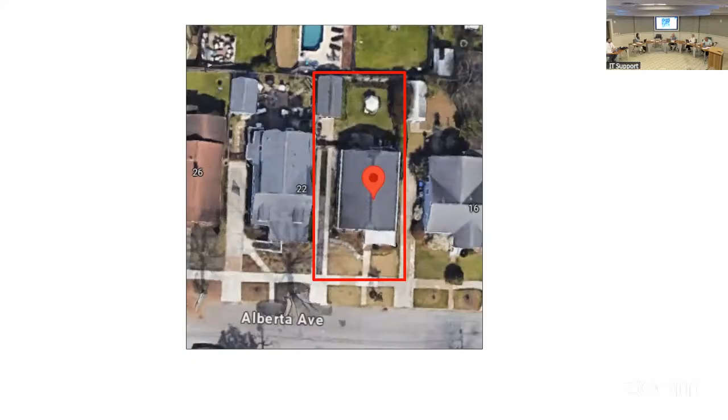Agenda item B1, 20 Alberta. Travis, if you'll give us an introduction and overview of the project, please. 20 Alberta Avenue is in Wagener Terrace, Council District 6. It is in the historic materials demolition purview, so it is a category 4 group 2, built circa 1940. They are requesting approval of a partial demolition, including the back portion of the roof. We have an aerial of the property, and we are ready for the applicant.

Thank you, Travis, and thank you, board, and thank you for meeting with me on the site this morning. Some of the things I said there, I'll say again so the public hears. The owners have been in the house for over 7 years. They're invested in this neighborhood and want to stay in the house, so they're looking to do an addition to allow for that to happen. It's a small house right now, just over 1,000 square feet.

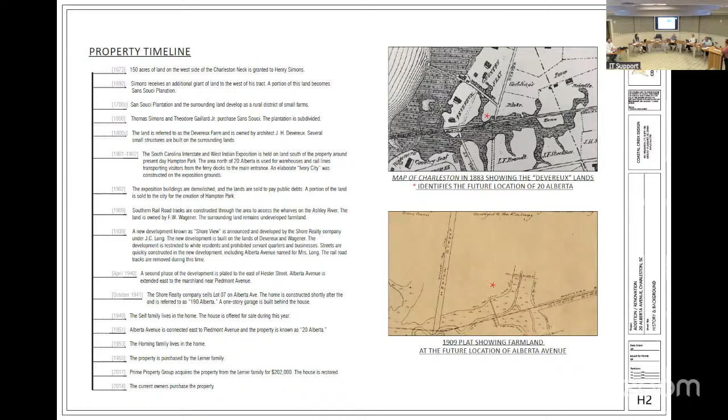We are looking to - let's see if I hit this the right way - so just some of the other aerials, historic timeline for the property, and we'll get to a nice little picture bottom left of what we have, the existing survey, and hopefully a demolition plan here. So we're removing the back third of the roof to allow for an addition to be put on the rear. Something I didn't mention on site but will mention today: that rear demolition - that first floor level on the rear will be 2-story, but that first floor level is a screen porch, so the majority of the siding material on the rear wall will remain.

We are stepping our addition in 12 inches from each corner to allow for the shape of the original house to remain intact. We feel that with the application we're putting forward, we're doing the best that we can to adhere to the guidelines that the BAR gives, that if there's going to be a roof that's removed, that it occurs in the back portion of the property to maintain the front. So we're attempting to do all of that.

Let's see, so here's the elevations. That window on the left side, that's going to have to be pantry area, which is the reason for the request for that removal. And then you can see the small portion of that roof, trying to keep the house as close to remaining the same and visually as is as possible, and still accomplish the goal that the owners have.

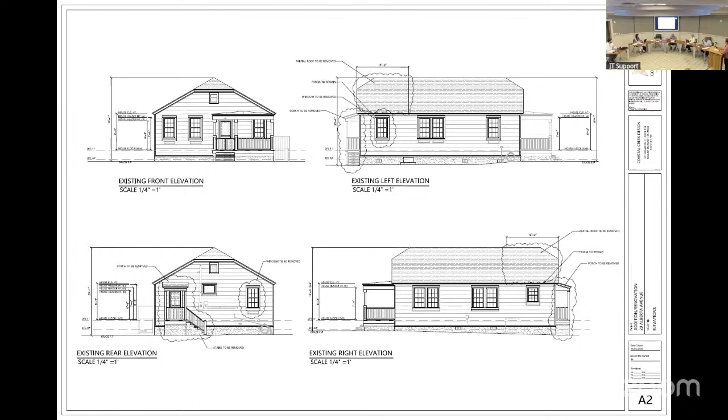Question: can you go back, when we were on site this morning, you said you would be removing the rear wall, did you? So, yeah, that's incorrect. The first floor addition that goes back is just a screen porch. And then what would be on the second floor would be the master bedroom.

Any other questions for the applicant? Thank you. Do we have anyone speaking?

I'm Catherine Alexander with the Preservation Society of Charleston. We thank the applicant for their time on site this morning. While we appreciate that demolition is concentrated to the rear of the roof, we ask that the scope of demolition be reduced and that both the ridge and the eaves be preserved to allow the distinct jerkinhead roof form to remain legible. We also encourage the applicant to reference the Wagener Terrace area character appraisal, which was adopted by the BAR in 2024 and is available on the city's website as a resource for identifying and preserving the character defining features that make this neighborhood so distinctive. Thank you.

Good afternoon, Lisa Jones, Historic Charleston Foundation. We've reviewed the request for partial demolition of the back roof and would like to express our concern that the demolition as presented is too large in scale, much like the Preservation Society just noted. We request that in addition to preserving the ridge, the demolition area be pulled back and away from the roof edge, and the clipped gables be maintained as a character defining feature. The height and width of the demolition should be reduced in size to be more in keeping with demolition needed for dormers. Thank you so much for your consideration.

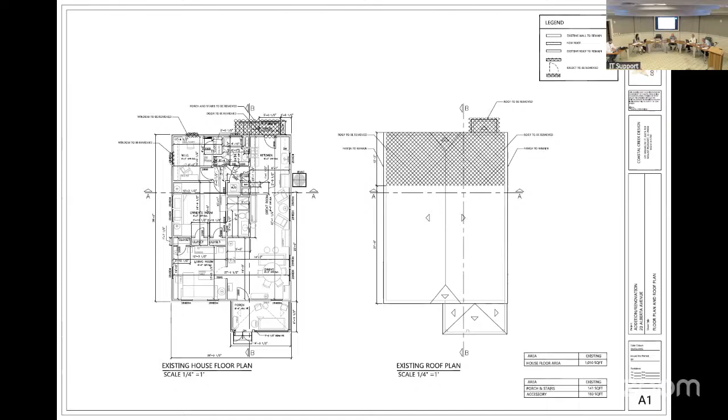All right, staff observations. Staff appreciates keeping the request to the rear of the building. The clipped gable roof is a unique roof form, and the proposed demolition would erase this character defining feature. This roof is highly visible from Alberta Avenue. Staff's recommendation is denial. However, staff would support a new submittal for demolition of the rear elevation below the eaves.

You, Travis. Joel, did you want to respond to or clarify anything? Sure, thank you. The intent is that we will maintain the eave line, the back ridge, that portion of the roof. That ridge was intended to come off there, but we would be stacking on the exterior wall, and then stepping in at the back, but we're going to maintain that eave line. I guess I'll just answer questions that y'all have.

I hope that y'all would be supportive, even though staff isn't and others aren't. But if you aren't, if we could maybe break this up, if there are pieces that could be approved so that we can move forward with redesign. That we hope. Thank you.

We got a question for you then. So if you say you're going to keep the eave and the hip feature at the back, is it not the hip feature, just that eave line, the fascia line, going? That little clipped part is coming off because we're putting something over that portion. Understood. Thank you.

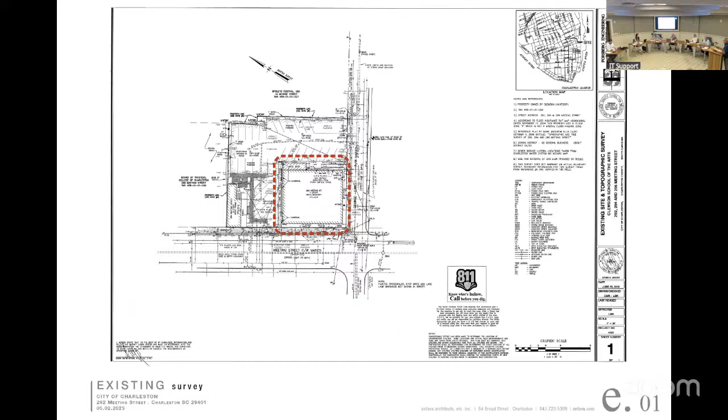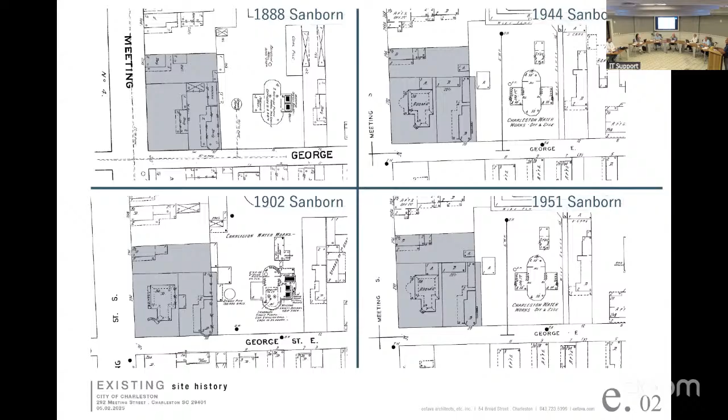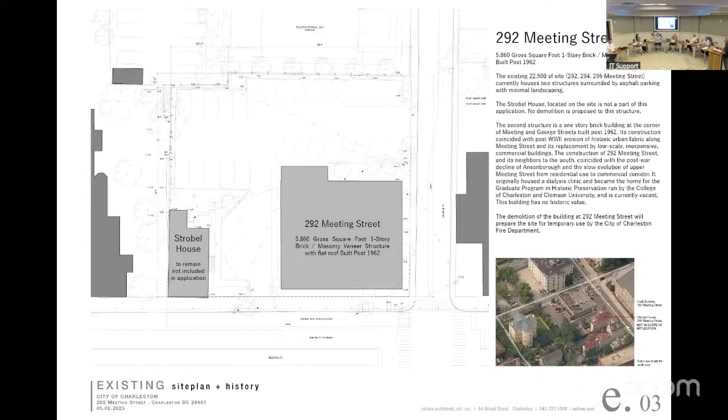As you saw, and in the submission packet, it was built in the 60s and has had several lives, the last of which was for Clemson University Architecture School of Preservation Program. But as documented by the Sanborn maps, there was another, very handsome structure there well prior to this building. It's just 292 Meeting that we'd be requesting removal for. It was requested for removal 13 years ago and granted at that time, but that project did not move forward, so it has been there since. There's nothing, quite honestly, related to it of historic value.

We did discuss the fact that some of the brick looks like it's salvaged, nicer brick from another project, but unfortunately a lot of the mortar looks like it's Portland cement, and I don't know that it could really be dealt with in a way that would save much of that. Again, interiors, as you've seen if you've been on site, the prior application was approved - so we appreciate your approval of this.

I'm also going to introduce Edmund Mose, the Director of Capital Projects, to kind of explain a little bit the genesis of this and why it's important.

Thank you, Eddie. Edmund Mose, Capital Projects, City of Charleston. So we've been working on this for quite a while with the planning department. This is in reference to a larger project, Fire Station number 2 and 3, the old central station, about a block and a half to two blocks south of this, at Wentworth and Meeting Street. A couple of years ago we did a full restoration - it's really for seismic reasons that we're doing full restoration on Fire Station 2 and 3, and we did one on number 6, on Cannon Street.

This is a life safety approach. The city is responsible for life safety, and we have to bring these old buildings up to seismic code, because if we have a seismic event it would take out our emergency response workers as well as the apparatus. Fire Station 2 and 3 is very integral to the city's safety program, because it's the only fire station south of Spring Street. The fire department always strives for an 8-minute or less response time.

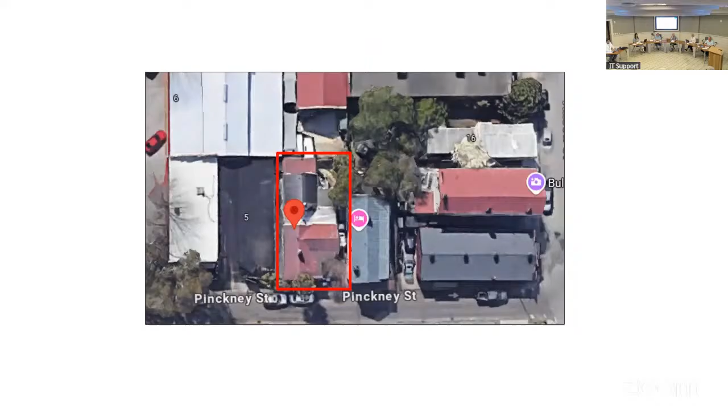Thank you. Okay, agenda item 3, 17 Pinckney Street. Travis, could you give us an introduction and overview of the project, please? 17 Pinckney Street is in Council District 8, category 4, circa 1902, in the Old and Historic District. They are requesting approval for demolition of select additions. This is the aerial view on Pinckney Street, and we are ready for the applicant.

Thank you, Dan Sweeney with Stump House. I apologize for my appearance, I left the house today without my long pants and shoes. I've been on job sites all day after seeing you all. Thank you also for meeting out, I'm just kidding. Didn't realize it till I was starting to head over here. Thank you for meeting me on site this morning.

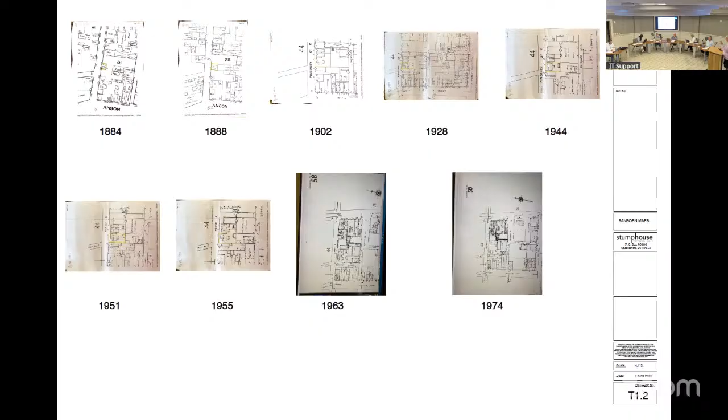The research I did to try and identify what the structures looked like on the site: the Freedman's Cottage first shows up in 1902. In 1928, there's an outbuilding shown on the maps that is illegible, but in the 1944 map it is clearly labeled a shed. Those two structures remain the same through 1951, 1955, 1963, and 1974. It's interesting to note there are several other buildings around, including in 1974, two single homes that were lost between 1963 and 1974. So it wasn't just a straight copy each of these successive years for this parcel, I don't believe.

The request here tonight, Pinckney Street is on your left. The red portions of the building, I believe, potentially are original. They have terne metal roofs, red terne metal roofs. Freedman's Cottage is on the left.

The three areas that are gray are actually three different colors of gray. It's hard to see from here, but the darkest gray, I believe, encompassed at one point in time a shed, a porch off the rear of the house, a very small porch, which was enlarged somewhere around 1950, I think on the 55 map.

But I believe we're looking at three different additions. The only addition that I can substantiate its age is the one with the stairs in it. That is a two-story addition. The other two gray areas are flat roofs, essentially. The one on the left is a TPO roof, and the one on the right-hand side is asphalt shingles, both flat.

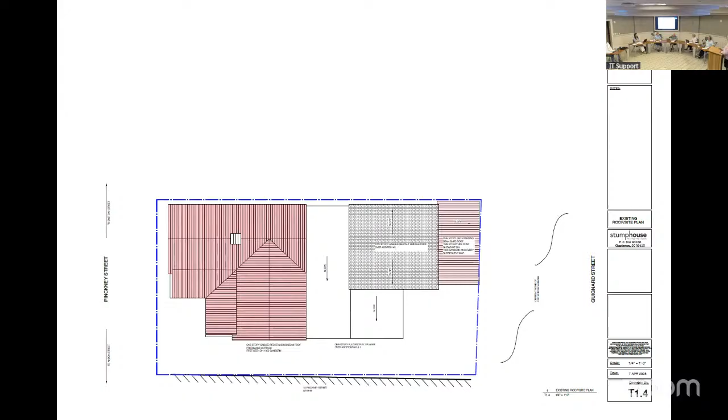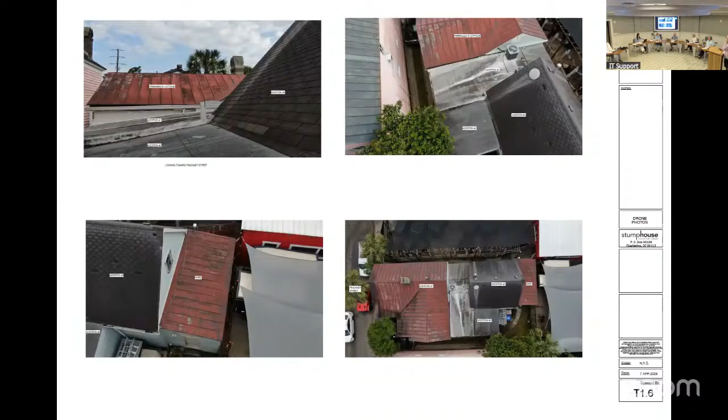This, you can see the flat roofs here. And then I had a series of photographs, exterior of the house. Here, we sent a drone up and you can see the roof lines. The bottom right hand is what I believe is the shed building out back.

And these additions - I will say then that the 1992 addition linked the Freedman's Cottage to the shed. Previously, before 1992, you had space out there.

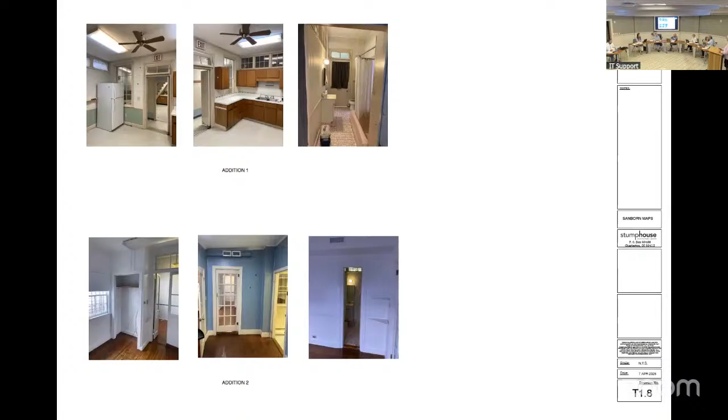And then there's some photographs inside, walking through the house and crawling under as much as we could with Richard Marks. We exposed some nails to try and see if they were common nails or cut nails. So there's a mix of both. There's a mix of siding. It is very difficult to tell. There are some, it looks like old door frames that have been used but probably moved from one place to another place. There's a lot of good material which will be saved.

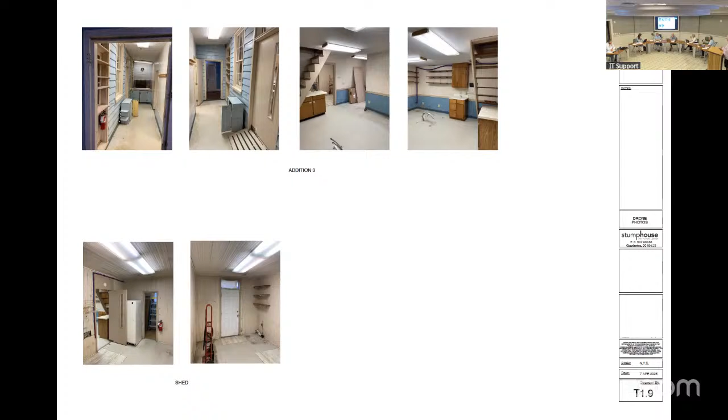This is what would have been the rear porch, I believe, a portion of it, but there are no walls. On the left hand, the top left, you can see that it was an exterior at some point in time. That's it.

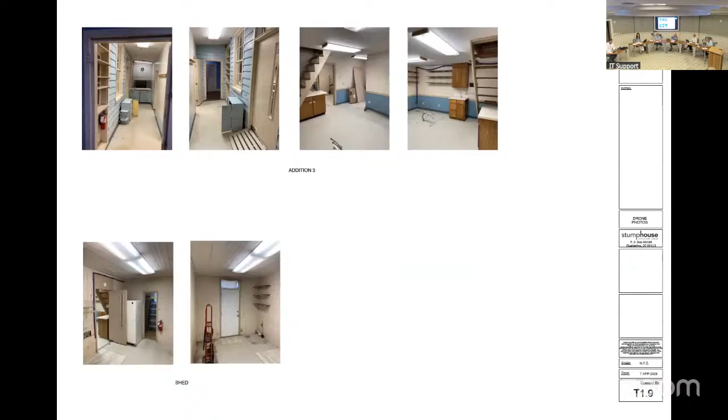Okay, Travis, if you give us any staff comments and recommendations, please. All right, staff observation, per the Sanborn maps, staff is opposed to demolition of what is being called by the applicant addition 1, as there are portions seen on the 1902 Sanborn map. We are just clarifying that the rear shed is not part of the demo request scope. Staff conditions would be addition number 1 not be demolished. And if approved, this project has to wait a 30-day appeal period before a permit could be approved. Our recommendation is approval of demolition with staff and board conditions.

Thank you, Travis. Mr. Twinney, did you want to respond to or clarify anything raised in the public comment or the staff comments? No, I don't, I would only reiterate that the porch that's off the rear of the house, I believe was there and is shown definitely on the Sanborn maps, but was much smaller than what's out there today. I believe it's been fully enveloped. And there's no walls to it, I don't think anymore.

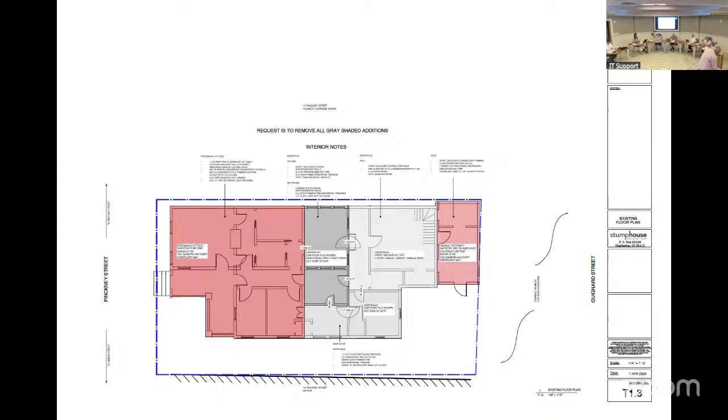Hello, I'm Julie Martin with Julie Martin Architects. Thank you all for taking the time to consider this application and even go visit this wall in person this morning. As you probably recall, the dwelling on this property has been approved for demolition and a new dwelling has been approved for construction, but I don't believe the wall was ever addressed in those applications. The contractor and owners would like to take it down to facilitate demolition and construction. Wertimer and Cline is working on a redesign of the garden, and they would like to reconsider the vehicular access and also add a proper pedestrian access. So I think it's pretty clear this is not a historic wall or special in any way, but we are here to request the demolition of it.

Thank you. Any questions for the applicant?

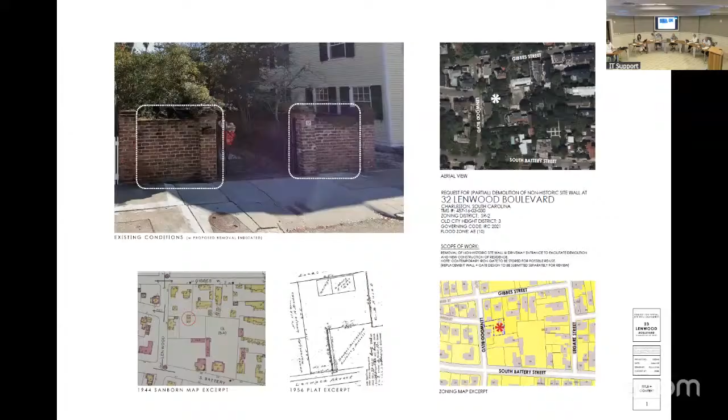Do we have anyone speaking? Travis, if you'll give us city staff comments and recommendations, please.

Staff observation: the wall is highly visible from Lenwood Boulevard. The construction date has not been provided to staff, and staff has not received proposed plans for reconstruction of the wall.

Julie, did you want to respond to or clarify anything? I was not aware that staff wanted more information. It would have been happy to provide that, but here we are.

Thank you all. Public comment and the applicant's presentation is now closed. We'll move into board discussion and a vote.

As to the age of the wall, that seems to be what staff is largely concerned with, and I think others would agree with me. It's not a terribly old wall. It's built out of concrete block, a CMU wall, faced with brick. The brick has a Portland cement mortar, not a lime mortar, so in my eyes this wall is not terribly old. It was probably built during one of the additions to the existing house on site.

The wall does contribute to the streetscape, so eventually something does need to go back, but that's a different review. I'm inclined to support the application.

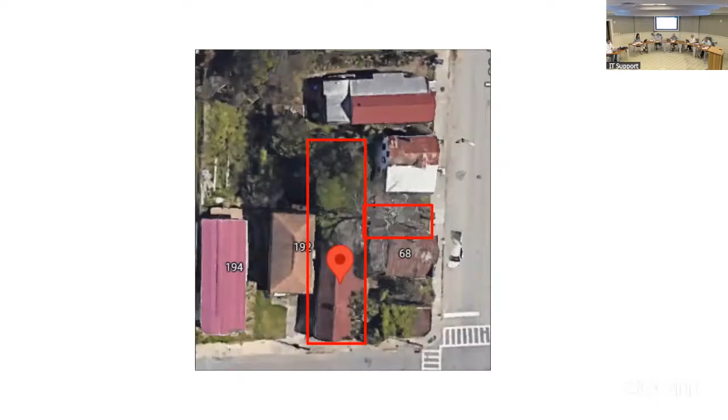Agenda item 5, 190 Nassau Street. Travis, if you'll give us an introduction and overview of the project. 190 Nassau Street, on the east side, Council District 4. It is unrated, circa 1910, in our Historic Materials Demolition Purview District. They're requesting after-the-fact approval for partial demolition, including exterior walls and a back addition. Here is an aerial of the property, and we are ready for the applicant.

Good evening everyone, my name is Anthony Disu. I'm the owner and general contractor of the property at 190 Nassau Street. This is actually our second time back here, but it's good to see you guys, and I always appreciate your time.

Last time the agenda item was split into two. For one of them, we were instructed to work with preservation staff on the resubmittal for the existing structure. We are in the process of doing that now. We submitted the revised plans to staff on May 5th. We have not yet had a meeting to discuss them. We're waiting for initial comments, and I did just receive those initial comments on those plans here.

So they are in the public view, and me bringing that up is just to reiterate that we are open to any kind of collaboration or input from anyone in the preservation community as we work to bring this building back. The historic fabric of this building was under a lot of modern sidings and weird things, you know, asbestos. So as we bring it back, we're open to any input from anybody who may have some.

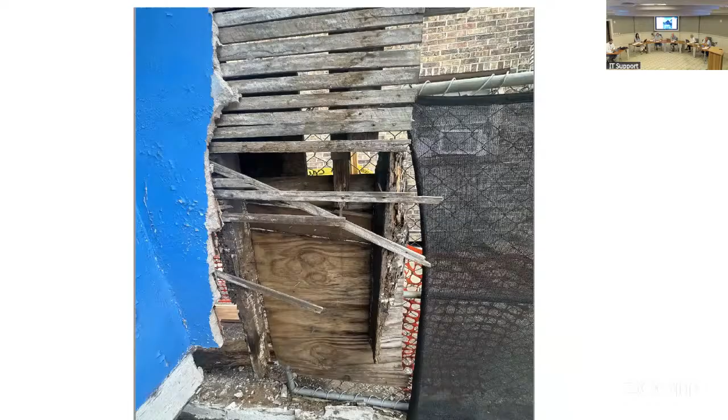All right, staff observations. To clarify, this request is for after-the-fact demolition of the rear approximately 30 feet of Freedman's Cottage. The only additional documentation staff has received from the last meeting is the notarized letter from the applicant. Per Google satellite image, you can see the rear 30 feet of the Freedman's Cottage, and per the street view, the rear addition is still visible in 2023 on Nassau Street. Our recommendation is for the board to confirm whether their previous motion has been met.

Thank you, Travis. Mr. Disu, did you want to respond to or clarify anything raised in the public comment or the city staff comments and recommendations? I would love to, thank you.

So a couple things to address, both the studies - in the time since the last meeting, it took us some time to develop the plan to get into a meeting, but I am relieved to hear what you had said, and we are more than willing to work with you to schedule times to come to the site and look at it. We will work hard to open up that communication, but the lack of communication is nowhere near a sign of our unwillingness to work with you and try to preserve and bring back what was really covered up with modern construction. So we'll be happy to study that with you and bring that back.

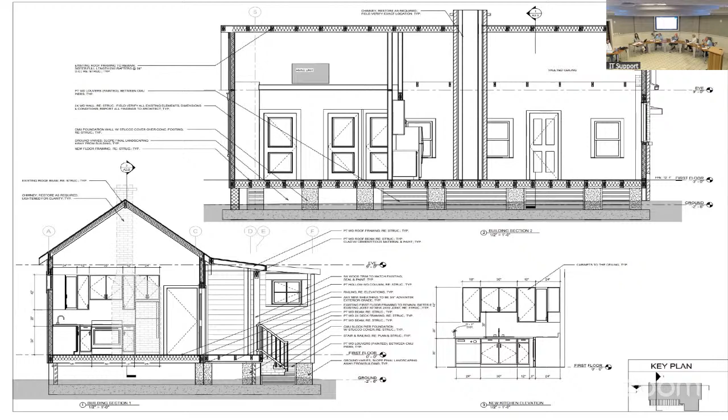You say addition, you mean the original 30 feet? Well, not the front part of the house, but the back 30 feet of it that was just gone. But it wasn't an addition. I believe, and Frankie, correct me if I'm wrong, this portion was the first part of that, and per his drawings, that's in the rebuilt process. He submitted drawings about what to do about the back 30 feet. We denied it, which effectively meant he needed to put it back in line with his drawings. So I think it is only the back 30 feet.

So the back 30 feet of that building is gone and we have no record of it, other than what you can see on Google Earth - that back corner of it. There isn't any more information on that. Does staff have any additional information? There is a plat showing the property prior to the demolition, so we have boundaries and dimensions, but the last survey from 5 years before didn't match the Sanborn maps.

I thought that was why you said there was an addition. No, for the Sanborns, that was the original dimensions. It roughly matched what that original plat, prior to this plat, showed. Do we know the date of this plat? It's 2024, a few months after the development - either July or September of 2024, I'm not sure. It's not a complete photograph. It's an image from September 2024.

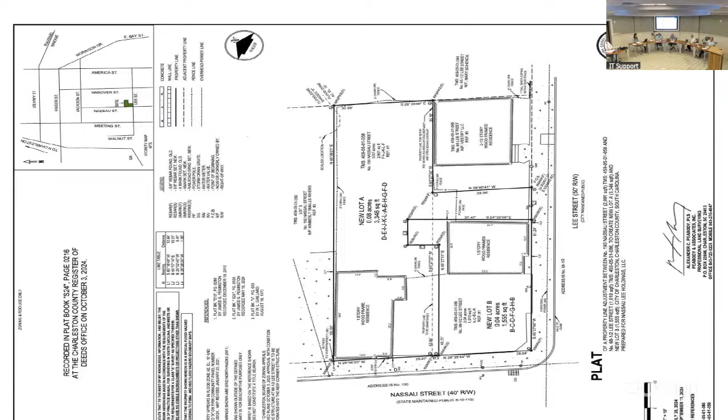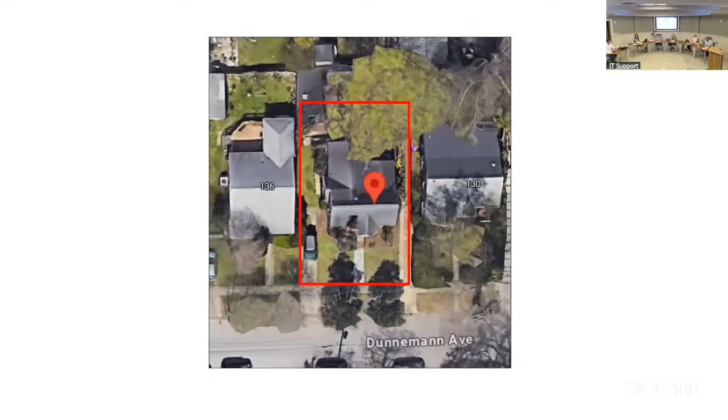Thank you, Mr. Disu. Okay, agenda item 6, 134 Dunnemann Avenue. Travis, if you'll give us an introduction and overview of the project. 134 Dunnemann Avenue is in Wagner Terrace, Council District 6. It's a Group 2, Category 4 in the Historic Materials Demolition Purview, circa 1947. They are requesting approval for partial demolition of all back sections of the gable roof. Here is an aerial, and we are ready for the applicant's presentation.

Sorry, I think I said my name last time - Joel Adrian, Coastal Creek Design, here for 134 Dunnemann. I believe you all reviewed this at the last meeting, May 8th, and I was not able to be here.

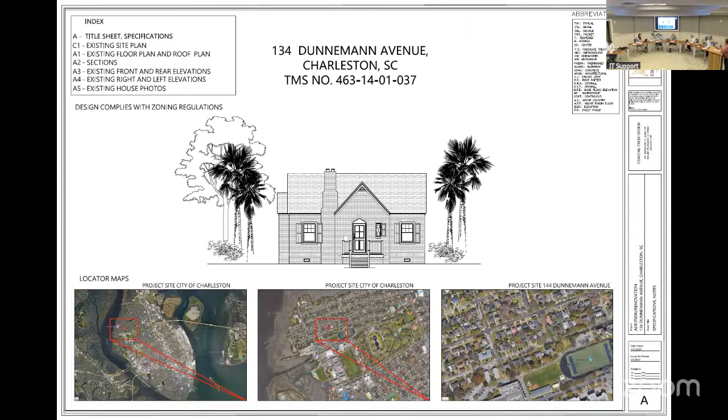It's back because the decision at the time was approval for the demolition, but to lower the proposed new roof to be at least 12 inches below the existing ridge. So I'm here asking if you would modify that and allow us to go 4 inches below the ridge. We are not going to remove that ridge; it will remain.

The drawing I really want to focus on is that little middle section, right there. If you look at the middle section, the existing 1x6 ridge is going to stay, and we are proposing a new ridge underneath, because the existing 1x6 is not going to carry the load of the new rafters going on it.

So our drawings show that the existing height and front elevation will not change. We will only be modifying the rear portion of the roof. The dormer wall we're proposing was only 6 feet 8 inches on the original drawing, so if we drop this down, the project becomes not buildable. We're just hopeful that you allow us to maintain that.

I think there was a question about whether the overhangs, the eaves, were going to remain. They will remain. We are going to remove that rear portion of the gable; the front elevation will remain the same. And then I think there's one more request.

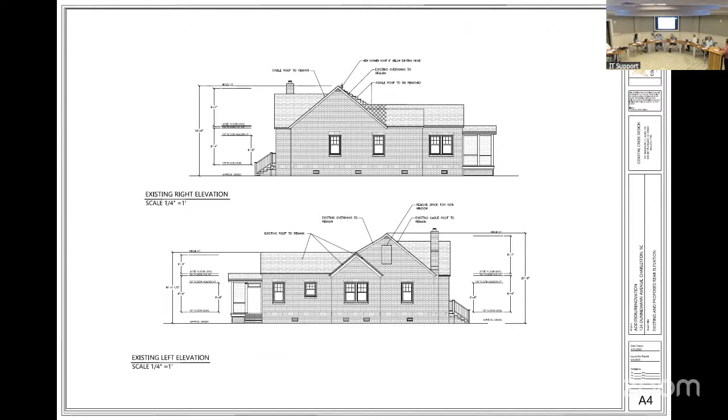You see that little small area up towards the gable end of brick - we would like to remove that just to be able to put a window in. I'll go to those pictures so you can see the house. I think that covers it. Really, this was giving you information so you know that the existing ridge will remain, the height of that roof will not change - we'll just be working on the back half.

The demolition is - you're requesting 4 inches off the ridge. Correct. And how many inches in from the eaves? Existing - there really isn't much, but the existing eaves will remain around that house, and you've got the brick portion, so we're going to stack on the stud portion of the house. So what will remain will be the trim and the thickness of the brick, and you're going to come off the frame. Correct, behind all of that veneer. Yeah, okay, all that will stay.

Thank you, any other questions? Four inches. Thank you. Do we have anyone speaking?

Jones, Historic Charleston Foundation - I'll be short and sweet here. We reviewed the application and we'd like to request that the demolition footprint be pinched in and reduced in scale, more to minimize the visual impact.

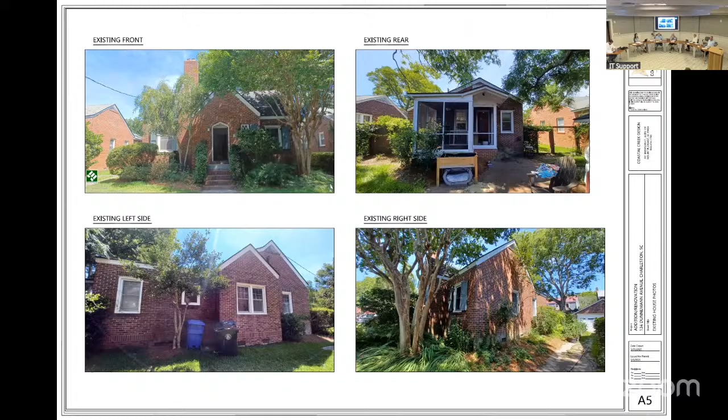Thank you, anyone else speaking? Okay, Travis, could you give the city staff comments and recommendations, please? Staff observations: to clarify, the applicant is requesting an alteration to a previously board-approved project by providing new information, and that new information has addressed some of the previous concerns by the board. Staff's recommendation is approval as submitted.

Thank you, Travis. Joel, did you want to respond to or clarify anything raised in the comments? No. So, thank you - public comment and the applicant's presentation is now closed. We'll move into board discussion and a vote.

They did do what we asked at the last meeting - it's just less. But I'll let the people with design brains on the board know if 4 inches is okay versus - I think we asked for a foot, yeah. I think I made the motion last time; we asked for a foot off the ridge and a foot off the sides.

And they've come back with more information where they have a clear dimension of 7 foot 1 inches is what they need. I would be in favor of approving it. It'd be nice if they'd step it in a foot on the sides, but if they don't, it won't kill me.

Actually, they want to frame off the wall. I can logically understand that. Yeah, and it's going to give them about 4 or 5 inches, I think. Yeah, it'll be a tricky little connection detail.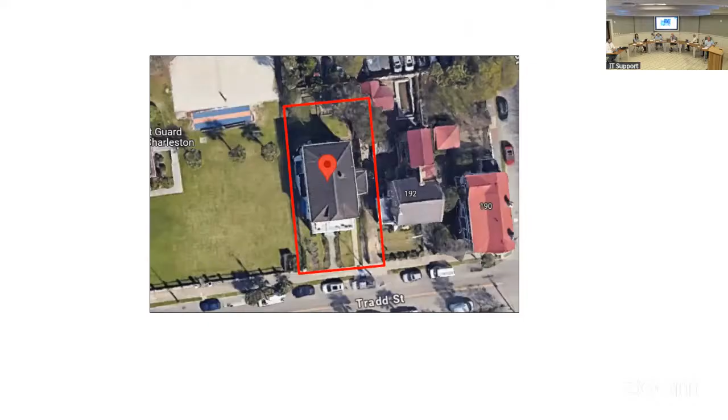Agenda item 7, 194 Tradd Street. Travis, if you could give us an introduction and overview of the project, please. 194 Tradd Street, in Charleston, Council District 8, Category 4, circa 1920, in the Old Historic District. They are requesting conceptual approval for a 1-story addition. This is an aerial of the property, and we are ready for the applicant.

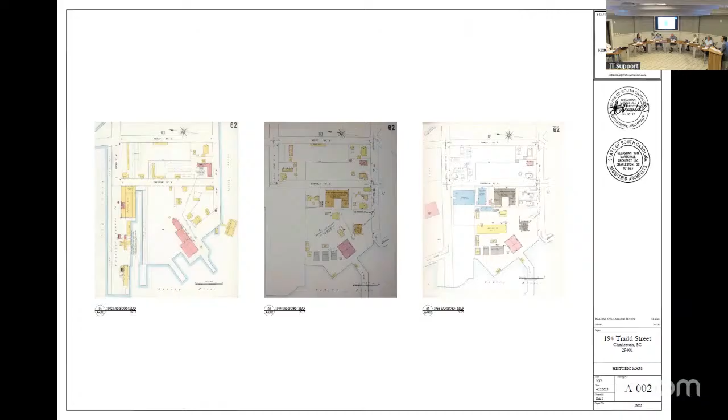So, some old Sanborn maps. You can see the original footprint of the house. It does not appear in 1902. It appears in 1944, and then again in 1955, right here. There are some other additions that were put on subsequently - there's a carport on the east side and an addition on the back. I'll get to that in a second.

Some more aerial images here. You can see that the house is visible. The proposed addition is visible across the front lawn of the Coast Guard station there.

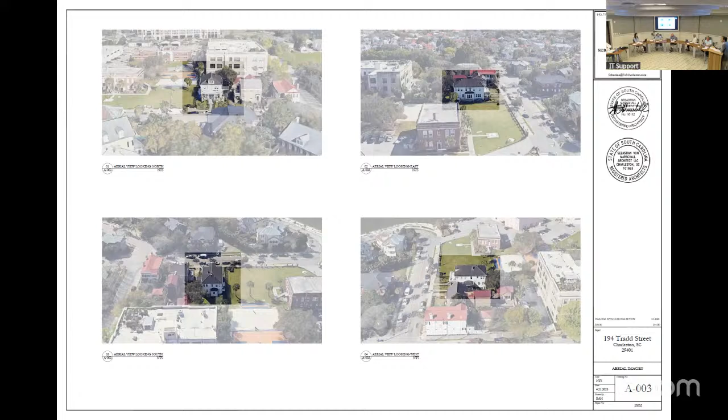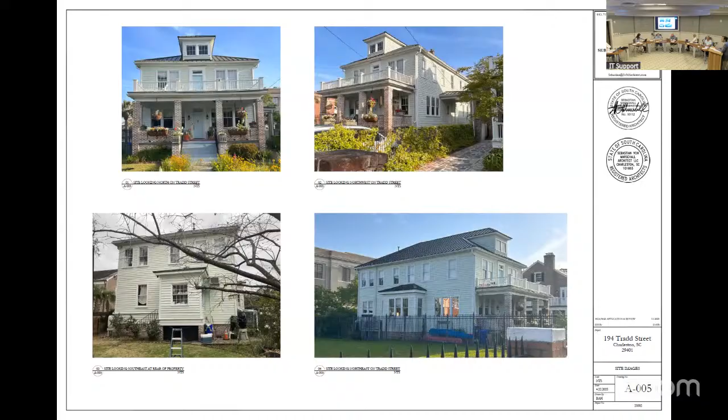Again, some of the context - so we have Colonial Revival right next door, we have the DuBose Heyward childhood home around the corner, or two doors down, and then a combination of various other revival styles on Murray and Tradd. Here's the house itself.

The proposed location of the addition is at the back, which you can see in the bottom left corner here. This addition itself does not appear in a 1980 tax map of the property, so we do not believe it is historic, and it's certainly not original to the house.

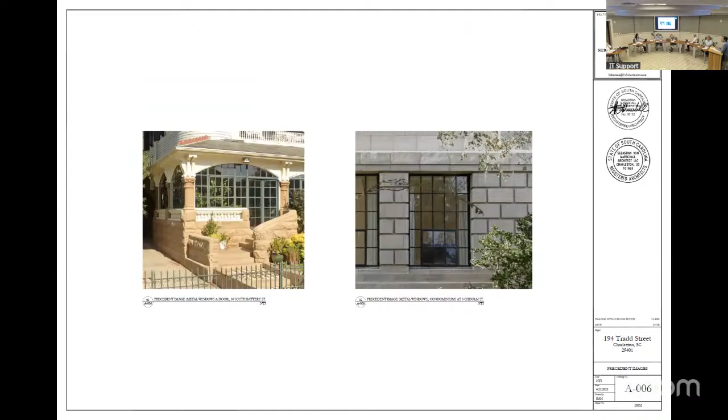Some precedent images that I'm going to introduce, just because I'm going to touch on some of the differentiated windows that we're going to be proposing at the back. The one on the left is at 50 South Battery - those are steel windows - and then the one on the right should be very familiar, those are the steel windows at the Chisholm Street Apartments location.

The kitchen is only about 10 feet by 12 feet, it's a galley. And this room will add some much needed storage and auxiliary space at the back of the house.

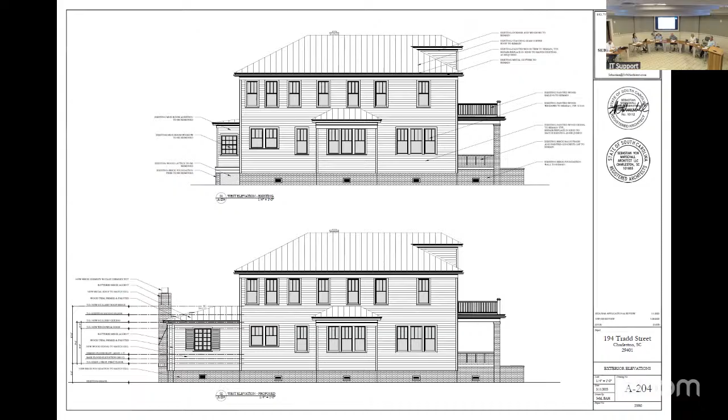Staff observation: staff is comfortable with the height, scale, and mass of the addition. Our recommendation is for conceptual approval with preliminary and final review by staff of permit drawings.

Thank you, Travis. Mr. von Marschall or Ms. Hip, did you want to respond to or clarify anything raised in the staff comments? No, thank you. All right, public comment on the applicant's presentation is now closed. We'll move into board discussion and a vote.

Thanks, it's fine, it suits the house nicely. It certainly is appropriate. The height, scale, and mass fits the architectural direction. I only have one little observation, other than hoping that my roof would be copper actually, and not Galvalume. And that is that the small windows on the rear seem to be pushed right against the corner boards of the bump out for the fireplace.

I don't know. It could be just, there could be some space in there graphically. It's such a small point. Sure.

203, I think. There, okay, right there. Yeah. So they seem to be pushed right against the corner.

A question about the architectural vocabulary—matching of the materials to the main house with the exception of the steel windows and doors. The only thing I noticed was the siding; I mean, obviously it's the same, but it might be nice to have it vary. I think everything was the same except the windows and doors. That was sort of my question. Maybe vary the siding profile.

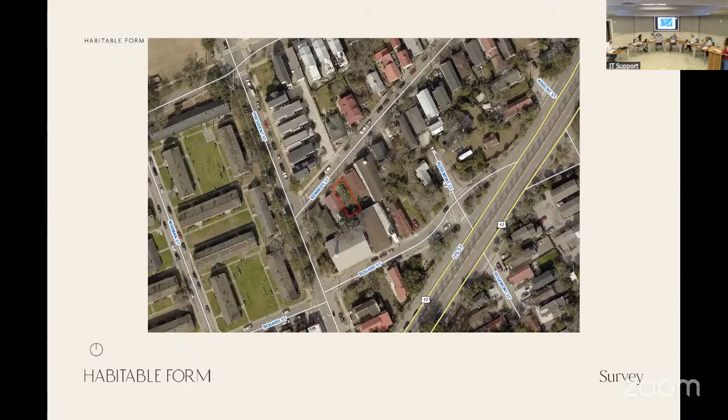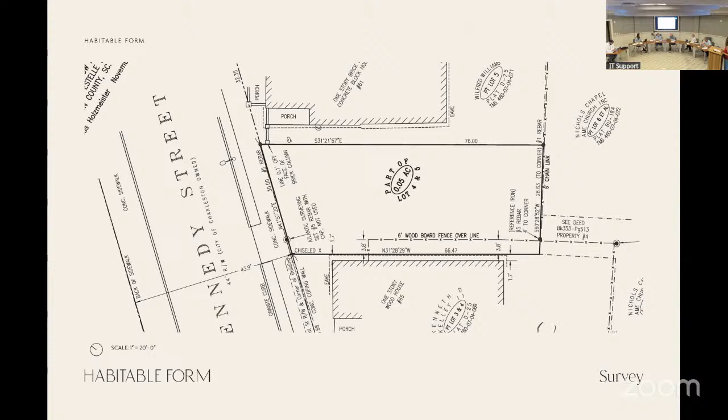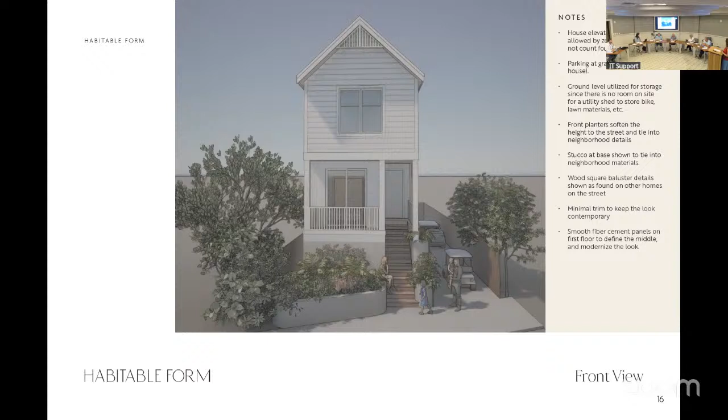Here you can see it's subtle, but like a red roof to tie into the other homes on the street. I know it's early for color, but it's something we'd like to incorporate to tie into the materials of the street. Since we're on such a very small lot, we couldn't fit a full front porch, but we managed to squeeze in a small balcony off the front bedroom and a little front entry porch, tucking the stairs under that entry to give a bit more of a grand feeling to a very small house.

We took inspiration from the simple form and detailing of 35 Kennedy, as I pointed out earlier, with that clean detailing and minimal trim, but a little more contemporary. We want this home to read as today, this home.

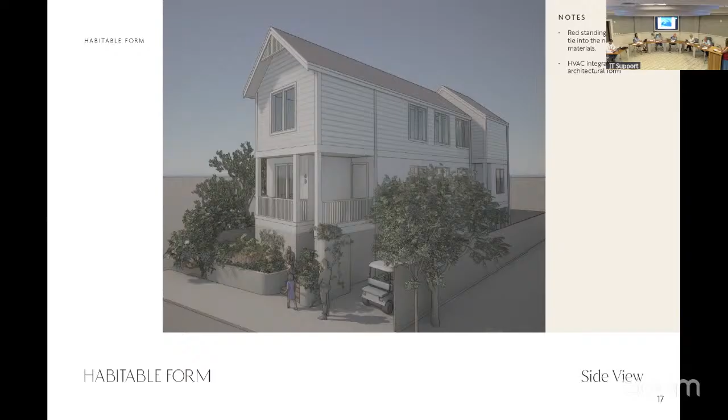Here you'll see we have a base, middle, and top, with a smooth stucco base at the foundation, a smooth fiber cement board in the middle, and lap siding at the top.

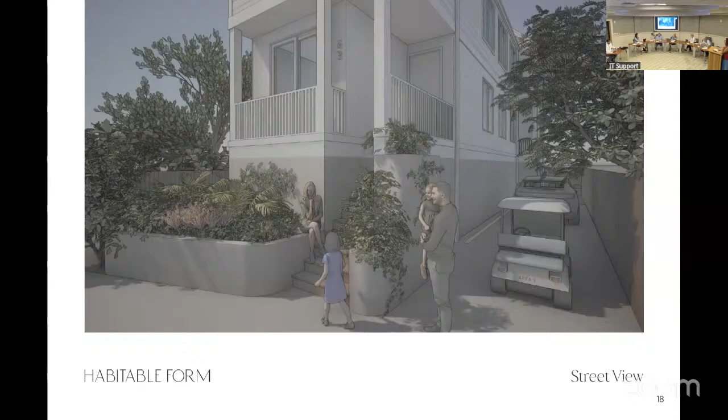Now we're getting into the working drawings. This site was also granted a variance from the setback requirements by the Board of Zoning Appeals, since it's a lot of insufficient size, so the side setbacks are smaller.

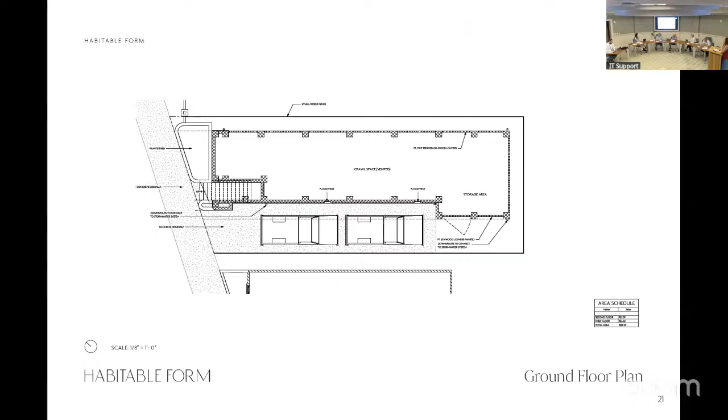This home is over a crawl space which we plan to use for parking to the side and storage below, accessing that from the rear.

Just some very efficient floor plans fitting on this very tight lot.

Standing seam metal roof.

And these are the elevations. Let's go through those until we get to the street elevations.

That concludes my presentation, and I'd be happy to take any questions.

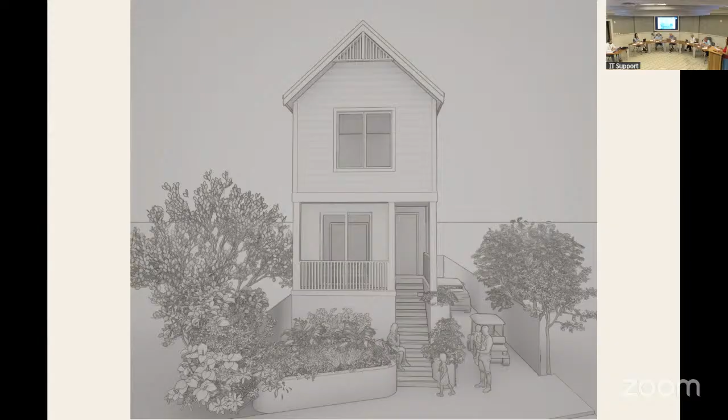What are your floor to ceiling heights on each floor? I think it's 9 feet, probably 10 feet on the first floor and 9 on the second, but we'd have to check the elevations to confirm. It looks like 8'5" to 17'6" is the first floor. Yeah, they're 9 and 9.

Okay, so really reasonable, because we can't fit a lot of stairs in this house, it's tight. I was just wondering if there was any play with the height. Yeah, I really tried to squeeze on this one, for sure.

Any other questions for the applicant? Thank you. Do we have anyone speaking from the public?

Anna Catherine Alexander with the Preservation Society of Charleston.

This proposal undoubtedly represents a flood zone driven departure from the character and scale of this small scale streetscape, but we do appreciate the effort to mitigate the foundation height and gesture towards the architectural character of the West Side neighborhood. In this vein, a detailed comment is that we specifically encourage restudy of the proposed sliding glass door on the front elevation in favor of options more in keeping with the urban character of the surrounding properties. Thank you.

Hi, Lisa Jones with Historic Charleston Foundation. We reviewed the application for conceptual approval of the single-family dwelling at 63 Kennedy, and we believe as this is designed, the structure does not fit into the context of the surrounding one-story homes. We request that this be redesigned and reduced in scale.

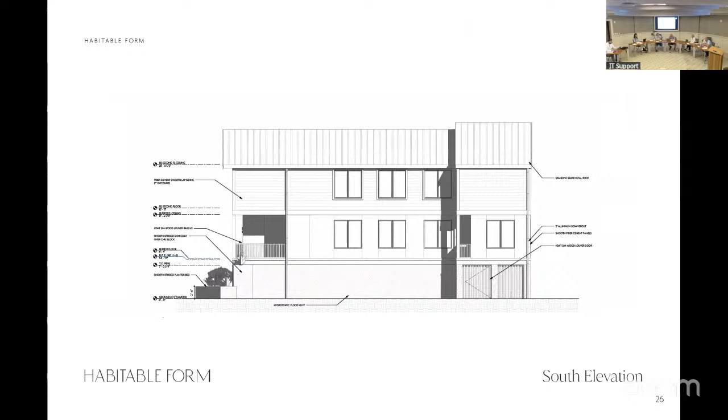All right, staff's observations. This appears to be elevated above DFE. We would suggest that is confirmed by the applicant. We do appreciate how the planter obscures the foundation. I have included here a principle for new construction referring to the verticality of windows. Our conditions for approval would be: remove sliding door, front porch to simplify the siding material appearance, and restudy windows. Our recommendation would be conceptual approval with board and staff conditions, and preliminary and final review by staff with permit drawings. Thank you.

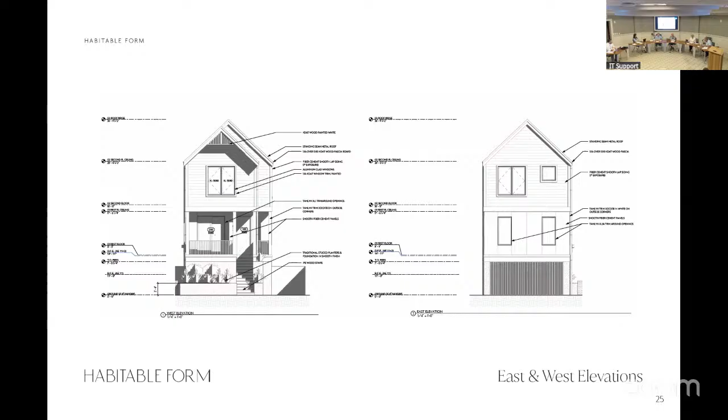It's an interesting project because if you look at sheet 28 and the streetscape, everything's nice and low, but everything's way below DFE, whatever you want to call it. So this house is really towering over everybody, but in the end the other guys are gonna have to come up. And I understand it's a small lot. I get the need to do a 2-story, but it doesn't seem fair to say you can only have a one-story house.

No, it's not an overly large square footage to start with, and if you cut that in half, you're talking tiny house size. Then the math doesn't work to build anything. I don't think it's unreasonable to do a two-story house on such a little small lot. Yeah.

So it sounds like height and scale are okay. How about architectural direction? The only main thing I struggle with is the three different materials, one per floor. I personally think the two occupied floors should be of one material. It's just a personal preference of mine.

I think the planter wall helps with the scale. I think internalizing the stairs into the porch helps with the scale too. So I think she's done what she can to try to overcome some of that.

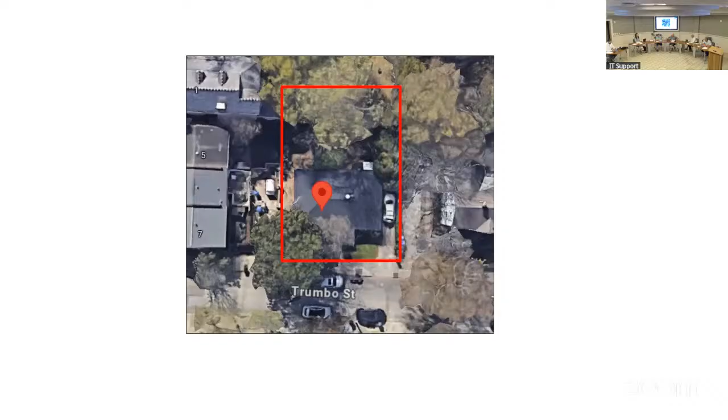Good evening, I'm Julie O'Connor with American Vernacular. I'm the designer on this project. We were before you a few months ago for the demolition of the ranch style house on this property, and we received a zoning variance a couple of weeks ago for the front setback. So we're back with a new house.

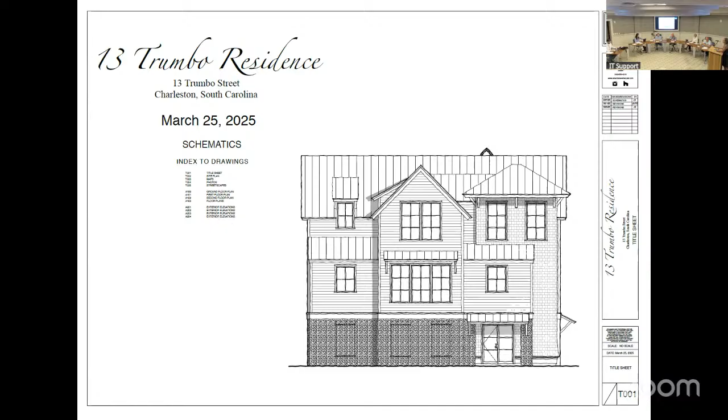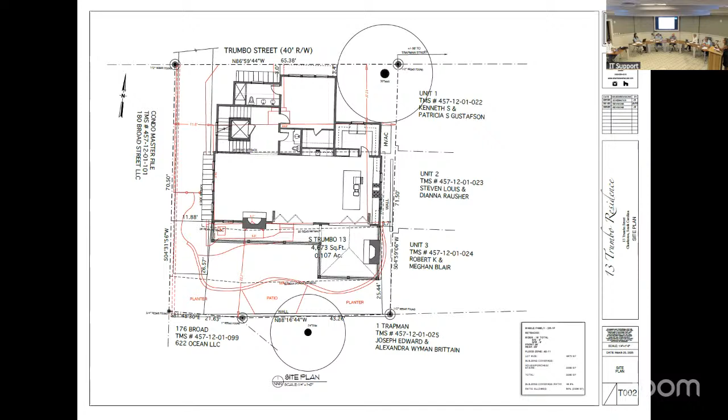So this is a site plan. As you can see, there's a large magnolia in the corner of the property. It's quite pretty, it has a very balanced and symmetrical canopy. And you'll see that we're trying to do some one-story elements to tuck under those. You'll see that in a second. But this is just showing you that we've asked for a front setback variance and have received it.

So this is our streetscape showing the scale. We're going with sort of a 2.5 story, well, it's 1.5 story over parking. You can see in this image that we're not that much taller than the 1920s house next door that's sitting down on the ground. If that were elevated, it would be taller than we are.

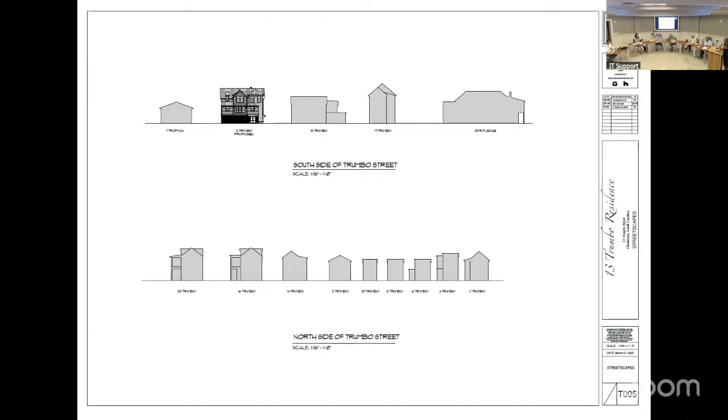We thought it'd be so pretty to have the entry at the ground floor and not have a big set of stairs taking up valuable real estate on this pretty small property, and also cluttering the front elevation. So we felt like a ground floor entry would be really beautiful.

As you can see, we're going with this sort of half story for the second floor to try and keep that house down a little bit lower. I think that's super successful. We went with some more modern fenestration to make the house of its time.

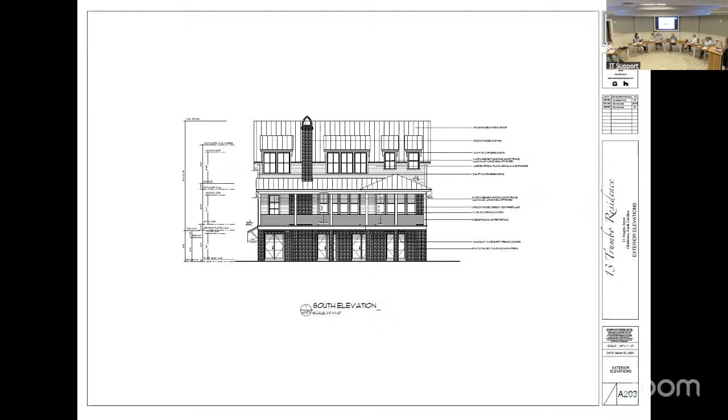The back with the porches, again, this is a good view of the half-story design we're going for, and a pretty simplified side elevation here. And here you can see how far back that section and that 1-story element is, to protect that tree and tuck under the canopy.

We did just some quick SketchUp just to give you a sense of the scale and the layout. And I am here for questions.

Any questions for the applicant? I don't have any, thank you. Do we have anyone speaking?

Hi, Lisa Jones, Historic Charleston Foundation. We've reviewed this application for conceptual approval of a single-family dwelling at 13 Trumbo, and we would like to request that the design be simplified and restudied to move in an architectural direction that's more in keeping with the historic character of the district. That's all, thank you.

Anna Catherine Alexander with the Preservation Society of Charleston. We really appreciate the applicant reaching out to us as always. Unfortunately, as proposed, we're not supportive of the design due to its large and complicated massing, which is out of character with the modest streetscape on Trumbo. We encourage simplification of the form and design for a better relationship with the context. The north elevation in particular should be restudied to better read as the primary facade, with a more clearly defined entrance for a stronger pedestrian experience. Given these concerns, we are not comfortable with this project moving forward at this time.

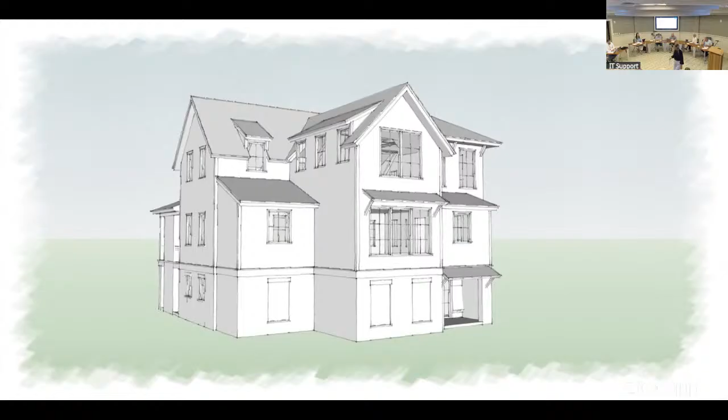Thank you. Anyone else speaking? Okay, Travis, if we can give the city staff comments and recommendations, please.

Staff's observation: I quoted one of the principles for new construction that discusses the use of authentic materials in Charleston. Our conditions for approval: one, restudy adding fenestration to the east wall first floor; two, simplify the variety of roof forms and the relationship between these forms, as well as fenestration, to mimic the rear facade; three, use a more cohesive material palette; four, the north facade departs from the architectural direction of the south facade, and cohesiveness between these two facades is needed. Our recommendation is deferral for restudy of architectural direction with staff and board conditions. Thank you, Travis.

Julie, did you want to respond to or clarify anything raised in the public comment or the city staff comments and recommendations? Sure, yeah, let's see.

Travis, are you talking about the east side at the front? Is that what you're talking about? Right there, that's what I was thinking.

I think we could certainly look at adding some fenestration there. We can obviously discuss materials, look at materials, talk about ways to bring that more into cohesion with the neighborhood.

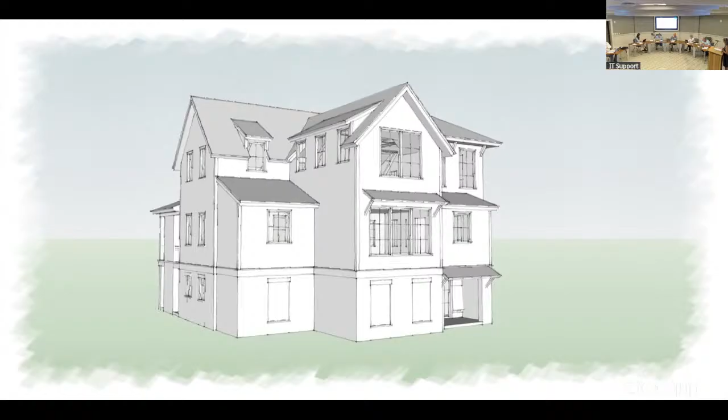In addition to that, I feel like our front entry is quite well defined, with our vestibule area and bracketed roof. In terms of north and south cohesion, the front and back of the house aren't visible with each other, so I'm not certain what that comment is supposed to achieve. But I'm super happy with the design. Hope you have some good comments for me.

Thank you. All right, public comment and the applicant's presentation is now closed. We'll move into board discussion and a vote.

I tend to agree with the preservation groups and staff about the complexity of this form. First of all, I think it's a nice design, I just don't think it's the right approach for the site, for the context. If you look particularly at the houses across the street, they all have fairly simple forms, and this one is just a little too complex for its context. So I'd like to see a different approach taken to simplify its form and its fenestration.

Just one minor thing we've done on other projects where we've allowed parking underneath the house and garages to the side: it's always a good idea to push that garage door inward, just to cut down on its visibility from the street. But that's kind of it for me. It's more about the complexity of the form.

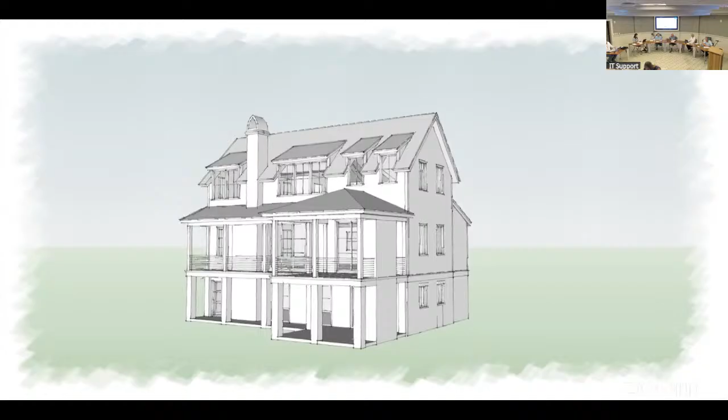Okay, agenda item 10, 158 Spring Street has been withdrawn by the applicant.

And the applicant's presentation. Yes, hello. Hopefully this will be quick. Appreciate your all's time today and every Wednesday, Thursday. Yes, this is a project. We renovated the 12 Magazine 3 years ago. It's a commercial building in a residential district primarily. There are several commercial areas around it, but it's a house that was built in the late 1700s and a wonderful structure, and the addition we feel was very compatible.

Today we returned with just one little small item, the front door. Currently it's a 6-panel door, not original to the structure. And because it's a clothing shop, the client Robin and Worthwhile, which is a store that's been around quite a long time, has customers come but they often don't know they're coming to the right place because it's so residential in character, and you can't really see past that solid front door. So apparently clients are turning away because they're not sure it's the right place. So all we're asking for is just a glass panel above, changing a 6 panel to a 2 panel with the glass above.

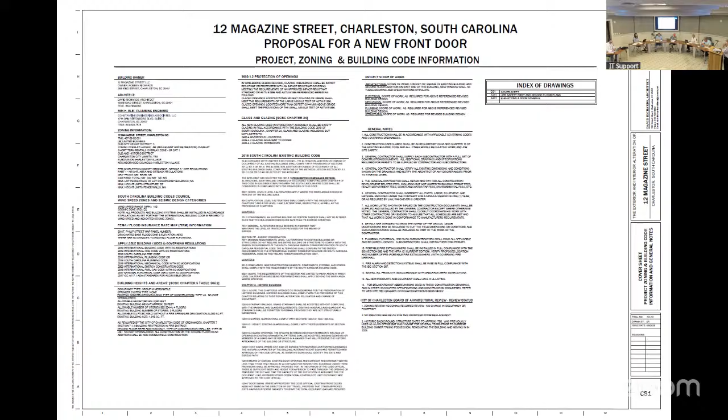Any other questions? All right, thank you. Do we have anyone speaking?

Hi, my name is Robin Richards and I'm the owner of Worthwhile, which was on King Street at 268 for 29 years. We moved over here about 3 years ago. When we were doing the renovation, it was really important to keep the character of the residential neighborhood, so we didn't want to change anything at all in the original 1785 house, except for the door. We didn't do it at the time, just because time went by. As you know, people walking down King Street have no trouble seeing in everywhere, and we've just had a lot of people say they can't find us. It's kind of a dark doorway, and if you open the door you could hit someone standing in the hallway because it's just a tiny hallway since we didn't change anything in the interior. So it would just help, I think, for the welcoming nature of a retail store to have a little bit of light that could come in. Yeah, that's it. Thank you.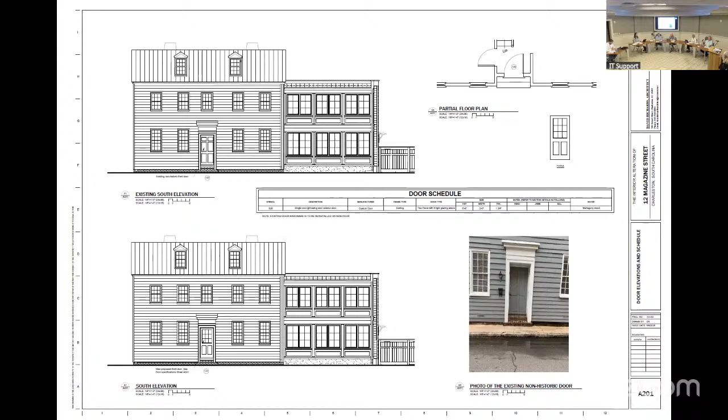Thank you. Do we have anyone else speaking? Okay, Travis, will you give us city staff comments and recommendations, please? Staff's observation was that this proposed door is not appropriate for the building, and our recommendation is denial as submitted.

Thank you, Travis. Mr. Richards, did you want to respond to or clarify anything raised? Yeah, I do. I just did a little survey today, and there are a number of colonial homes with just the exact same door that I'm proposing. So it's not the most common, but there are a number of these doors as I propose. Like I said, the door is not original, it's a white pine door that was probably installed in the 70s. And what we propose is absolutely appropriate, and it does bring light and welcome potential customers to the store.

Thank you. All right, public comment and the applicant's presentation is now closed. We'll move into board discussion and a vote.

I remember looking at this. We saw this. How long ago did you do the renovation?

2020, 21, 22. Yeah, we saw this. They did a good job. Anyways, I guess, so 6 years, that'd be about right.

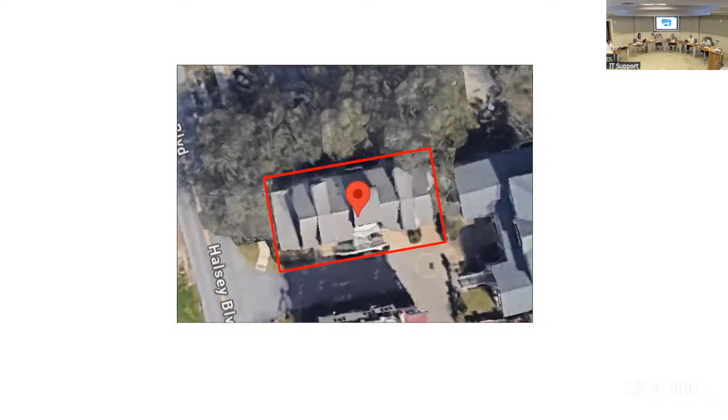Yes, thank you for your time. This was a home that was part of the Halsey Park development that was built in 2000. This home was built in 2017, so it's clearly not historic.

What's unique about it is, because it's part of this Halsey Park development, it doesn't have any land around it for an outdoor space. So my clients, John and Judy, have used the only outside space they have, the porches on the first and second level, which I show here in the photographs. They can't really use the porches year round, only several months of the year, because it's either too hot or too cold.

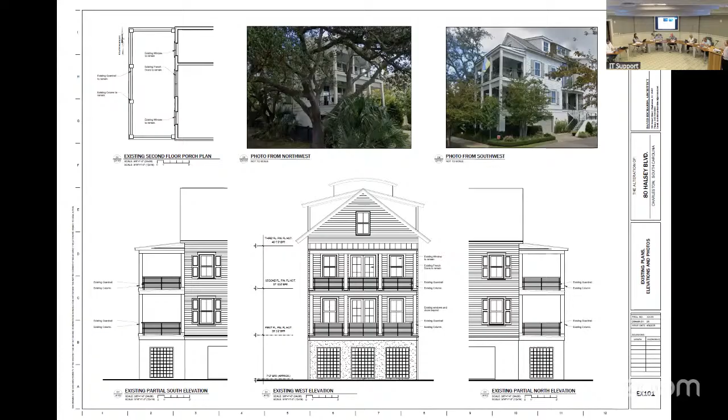What we've done is approach it trying to make this enclosure as minimally visible and discreet as possible. We have large panels of glass, keeping all the existing columns and railings, and putting large panels of glass above the railings. So there's no visible obstruction, just a little bit of trim around the edge of the column. It's minimally visible, not historic.

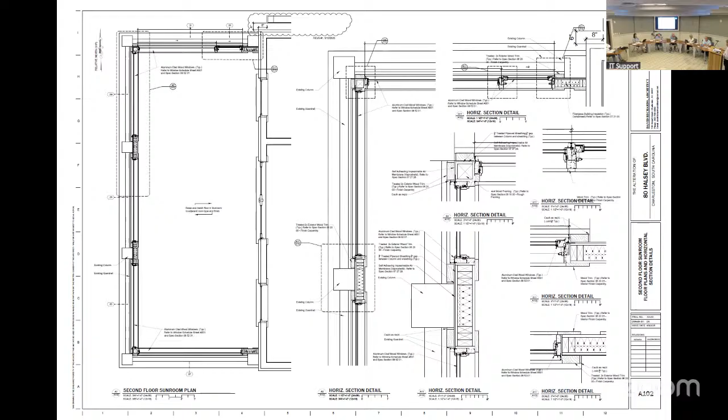And the neighbors are in support of it. It's really a small factor, but they'll be able to have the open porch on the first level, and on the second level, use this conditioned space year round to take advantage of the views.

Any questions? I do, go ahead. Why do you have a second—it blew my mind last night trying to review this. It says second floor sunroom plan, and you have two of them with two different sets of windows, I guess.

Let me get some clarity for you there. Above the railing, we have large expanses of glass, so it's minimally visible. Below the railing, they wanted sliding units so they could allow the breeze through, but it wouldn't be very visible—it's behind the railing. Understood, so that's the intent of that.

So this enclosure is set behind the columns and behind—correct, yeah, it slides in behind, right, so it's right behind, on the second floor. Built a wall behind the columns? That's right, like from the drawings it's just a glass wall. Right, so the renderings are pretty accurate—you wouldn't see the glazing.

Any other questions? John may have something to add here as well. Come on, John.

Thank you, members of the board, for hearing my wife and I and our application. Well, the wind really blew us here.

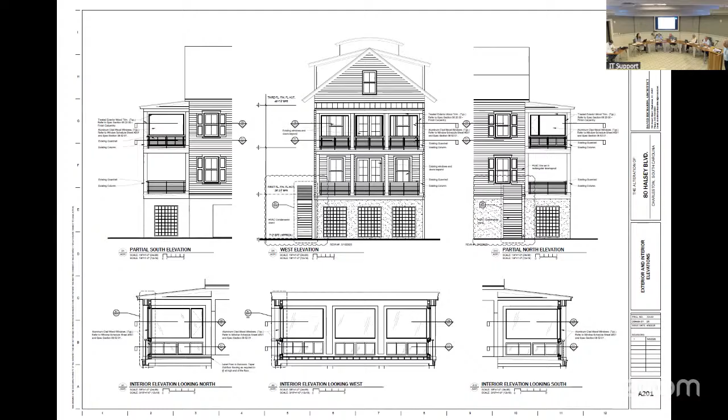Do we have anyone speaking from the public? Okay, Travis, you'll give us city staff comments and recommendations, please.

Staff is just acknowledging that this is a newer home, circa 2018, and the proposed drawings do show this being constructed interior of the existing columns and railing. Conditioned for approval as drawn. They are showing aluminum clad wood windows, and that would have to remain. Our recommendation is for conceptual approval with preliminary and final review by staff of permit drawings.

Thank you, Travis. Did the applicant want to respond to or clarify anything raised in the city staff comments and recommendations? No need to.

One quick question for David. Color wise, are you planning on maybe a dark color to recede, or? I think we would do the white so it blends in with the rest of the house and porch.

Yes. All right, public comment. The applicant's presentation is now closed. We'll move into board discussion and a vote.

Fine. Was that a motion, Bill? Yeah, I would. Motion for approval, conceptual approval with preliminary and final review by staff. I'll second it. All right, we have a motion on the floor for conceptual approval with preliminary and final review by staff. I have a second by Daryl. I'll put the motion to a vote.

Becky? No, opposed. Fillmore? Yeah, in favor. Bill? Yeah, in favor. Daryl? Yeah, in favor. Chair votes with the majority and the motion passes, 4 in favor and 1 against.

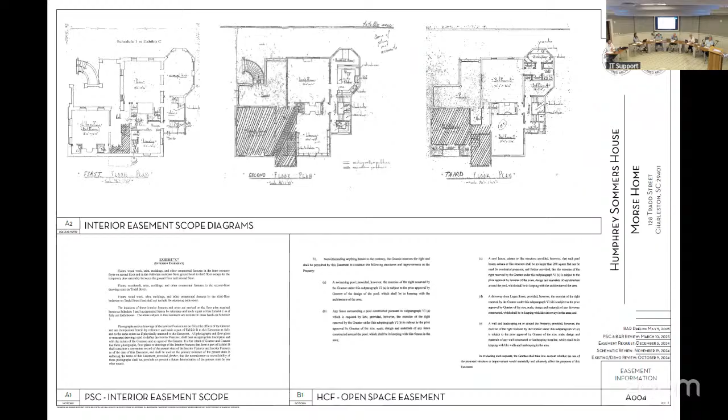Okay, here we are. I want to start by walking you through what I feel is one of the most beautiful patchwork builds south of Broad.

As you can see, the house started as a typical Charleston single house when it was built around 1750. Then in 1788, soon after it was originally built, it was transferred to a daughter as a wedding gift, and an addition was put on the house.

Then a piazza was added, and what became the formal dining room was added here, eliminating what would have been a pair of stacked windows on two floors over here, as well as a pair of windows on the ground floor. By 1830, we've added a stair volume at the rear of the property.

In 1888, we have another square volume added adjacent to the stair volume. Then in 1902, we have our first appearance of the poly bay, around 150 plus years after the house was built.

It was built at the time with lap siding. The rest of the house has siding with a bead on it, so it's already differentiated from the style of the original part of the house. Then in 1964, you can see that bath addition that we referenced previously.

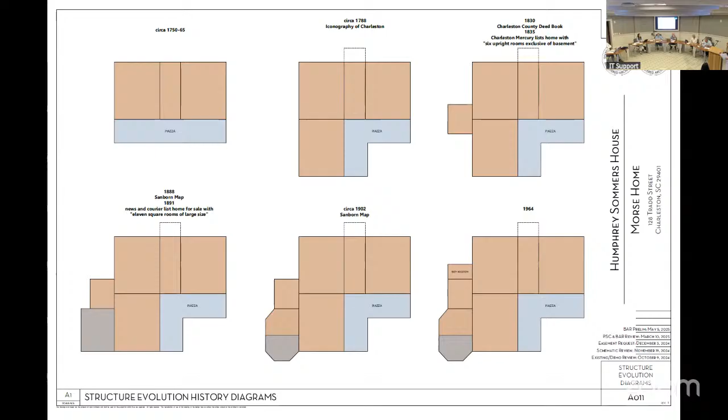BAR staff observations: this is an application for an alteration to a previous conceptual approval. Staff does not oppose the proposed windows and poly bay. Staff is also unclear as to what, if anything else, is being requested to change. Our recommendation is conceptual approval with windows, with preliminary and final review by staff of the permit drawings.

Thank you, Travis. Did you want to respond to or clarify anything raised in the public comment or staff comments? Sure. The only changes that were made were the siding profile on the bathroom bay. Right now it's shown beaded, kind of matching the main volume, but it will just be lap siding that will match the poly bay.

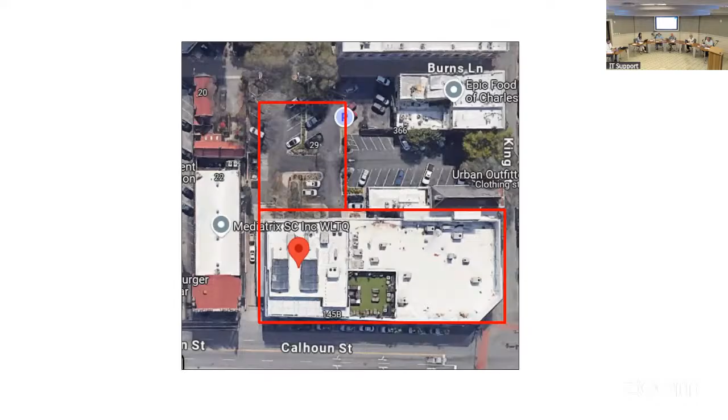It is unrated, circa 1980, in the old historic district. This is the appeal of a staff decision to install a raceway with LEDs into the existing canopy. This is an aerial of the property, and we're ready for the applicant.

Evening, y'all, thanks for your time, I really appreciate it. What we're proposing is just an illuminated addition to an existing sign that's already mounted on the canopy at 145 Calhoun. It's for a restaurant and nightclub called Ritual.

The basic goal is to shift the letters that are already on a raceway attached to the canopy, moving it back slightly since they're at the edge of the canopy facing the street, and then to add that new raceway with LEDs at that diagonal angle, so that we have some uplighting towards the letters.

So existing right now, as you can see, 'Ritual' is at the edge of that canopy. We push it back slightly, and add the new raceway with LEDs diagonally to shed light onto the faces of those existing letters. Electrical will be run from a junction box behind the letters to hide it, so it's not visible from the street. Everything will be painted to match the existing canopy, which is roughly a dark gray, black, faux marble look.

So the light would be visible, is that correct? Yes, sir, it would be seen there. The light would be shooting backwards and diagonally up to hit the faces of the existing letters. There's no baffle in front of it facing the street. Technically, the raceway would act as a way to not let light out forwards, so we're having it at an angle so it only shoots back towards the letters, back towards the building.

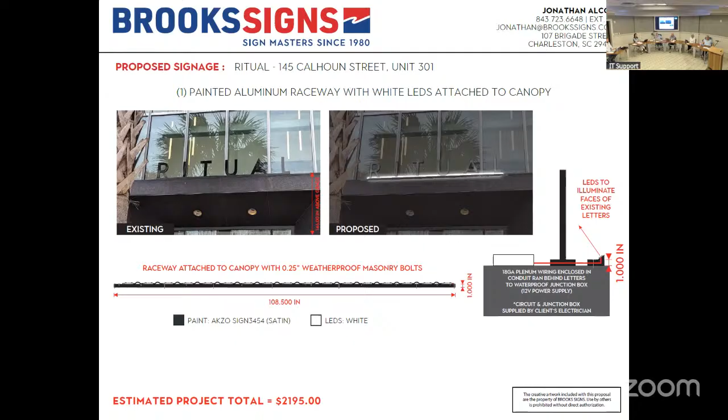Anyone else speaking? Travis, give us city staff comments and recommendations please. Staff only has an observation, as this is an appeal of a staff denial, and that is we cannot approve illuminated signage at staff level.

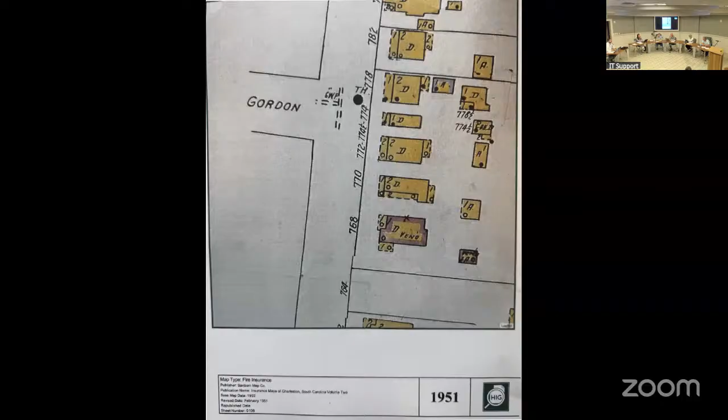And I can answer those questions. We'll do a response period and then you'll get to. All right, staff's observation: staff is comfortable with the height, scale, mass, and architectural direction of the addition. Our recommendation is conceptual approval with preliminary and final review by staff of permit drawings. Thank you, Travis. Now you can answer.

The only question was about what historic material would be removed. The back wall of the house would be removed, which actually solves a few problems for us, because the renovation done by Richard and Lori Hess in 2011—they were very interested in preservation and in trying for the Carolopolis Award—means all of the siding on the house is original, which is wonderful and one of the things we loved about it. What we didn't realize is that the condition of the siding is such that paint doesn't stick to it, so we constantly have peeling paint and exposed wood, which allows moisture into the house and damage. We've already had the entire house repainted once in the 12-13 years we've lived here, and now we'd have to do it again anyway.

So we really need to replace that siding as it is. The second issue is windows. The windows in the back of the house take the brunt of any storm or hurricane that comes by—our normal routine is to wrap up towels and stuff them in the windows because water and dirt come in, and it's caused the windows to rot. So we are removing that part of the house, but keeping it the way it is would be more damaging. I can add to that too: the addition was done with clad windows, and those aluminum clad windows the Husses put on are falling apart. They're not the original windows—there's lap siding on that. The only thing they're removing from the actual back of the house is adding on to the existing line, keeping within the same lines. The only thing they're removing is a deck that's falling apart.

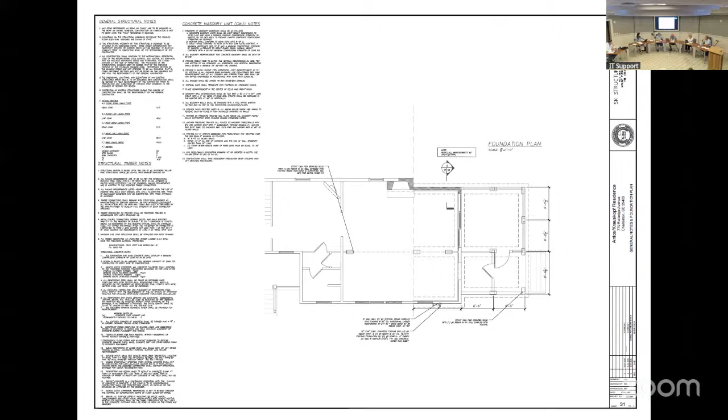According to the drawings, except for facing the rear of the house on the east elevation, except for a small area on the right-hand side, the drawings indicate that the entire rear elevation, at least the wall, the closure is being removed, as is the left side gable of the rear gable. The amount of that concerns me, as well as what that says about the rest of the addition.

I think the general architectural direction and form is fine, but the roof line occupies one side of the gable. On the rear, I think the roof needs to be dropped to come in under the existing roof line.

And I think on the south side, the addition is coplanar with the existing wall, and in fact the siding is the same and continues in. So while the architectural direction and form is okay, there are a number of steps that need to be taken. One is the roof line of the addition needs to be below the existing roof line of the house, so it does not impede on the gable.